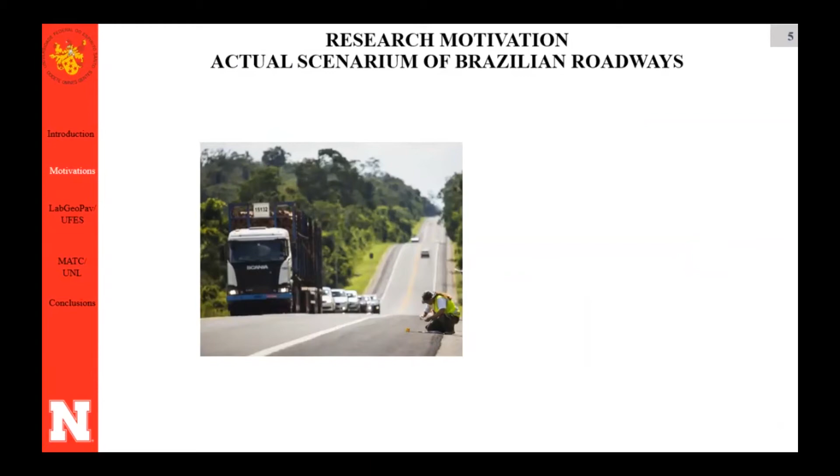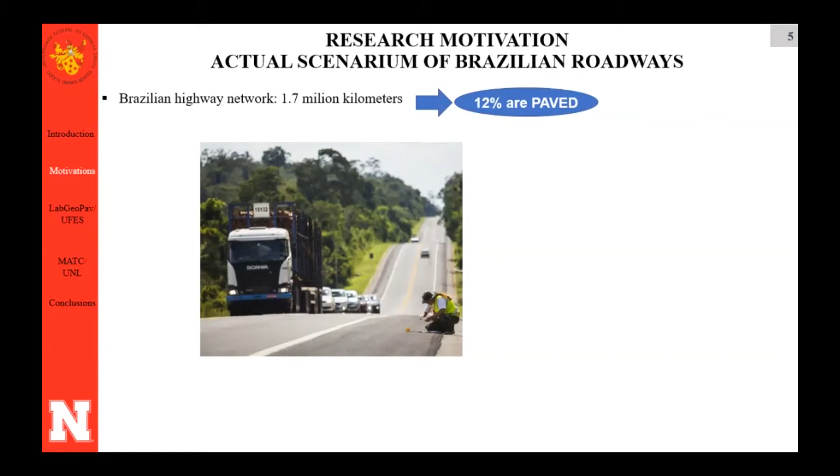And what are my research motivations? Many of you in this room got a chance to watch Dr. Rezende's presentation and mention how the conditions of Brazilian roadways are, and they are not in a good shape. Brazil has a total of 1.7 million kilometers of roadways - it's a really large country, but only 12% of the roadways are paved. So there is still much to be done in terms of constructing pavement structures.

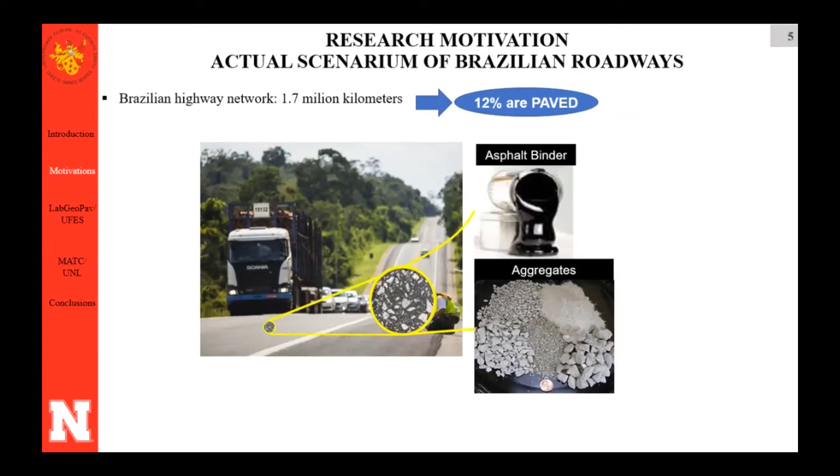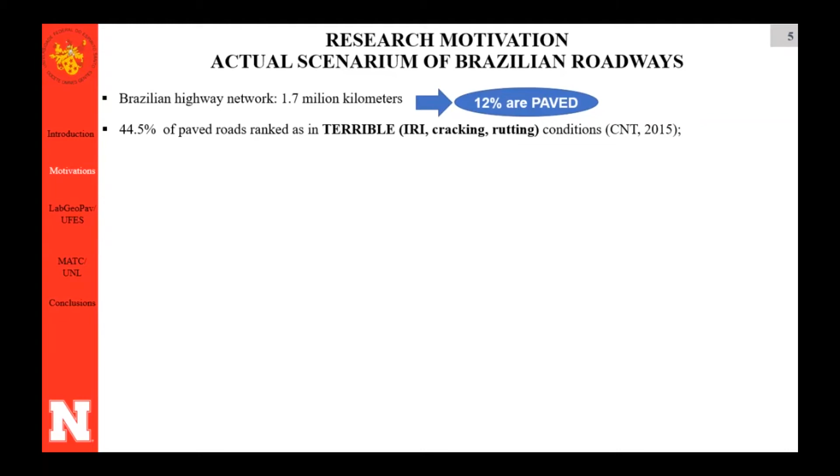Most of the roadways are made of asphalt, so they are flexible pavements, right? So the constituents are mainly asphalt binders and aggregates. The latest report from the national agency showed that almost 50% of the roads are ranked as in terrible condition. To rank as terrible, they have many forms that they fill out, and they mention the condition, the roughness index, the cracking, and the rutting on those segments that they evaluate to give the final report rank.

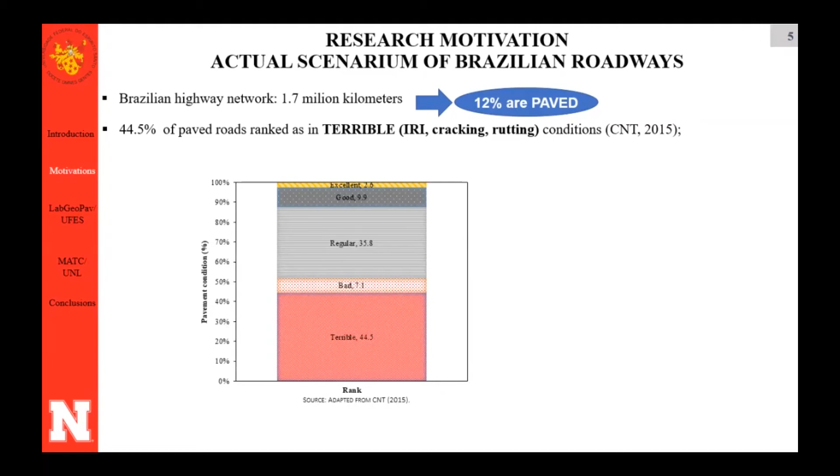So as you can see here, the conditions, more than 50% are either in bad or terrible condition. So we can see a lot of fatigue cracking or permanent deformation. This is just an illustration of the damage. And we need to improve the pavements.

In our state, in our university, there were no professors taking care of the research line related to the pavement area. So in 2011 was when I was hired as a professor, along with my partner, Patricio Pires - he's a good collaborator on my projects, you see. But both of us started to work at the university in 2011. From that year on, we started doing research in pavements at our university, the Federal University of Espirito Santo.

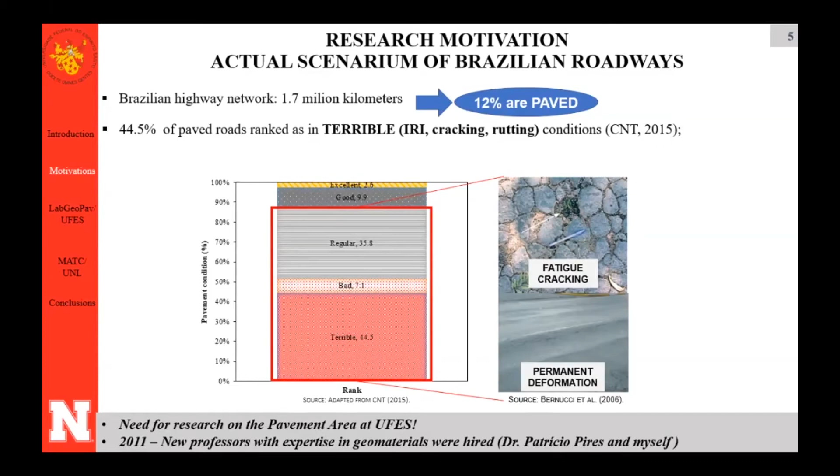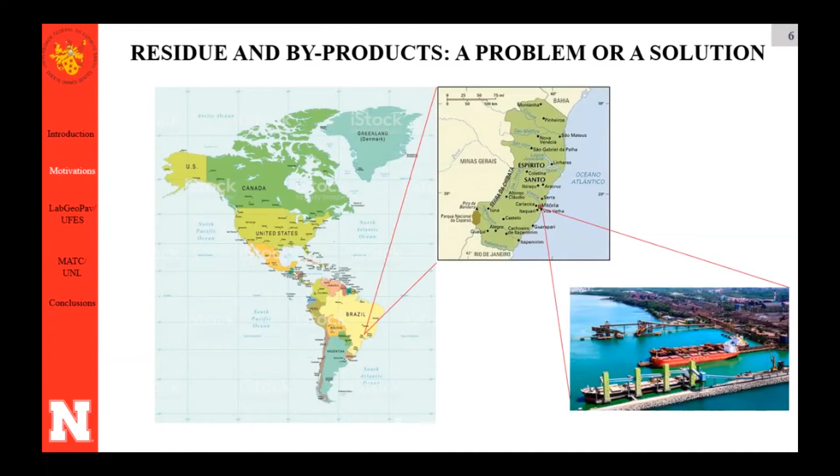Also, because of the geographic position, Vitória is located here at the coast. So there was the construction of the Port of Tubarão in 1966, which was constructed to export iron ore to the world.

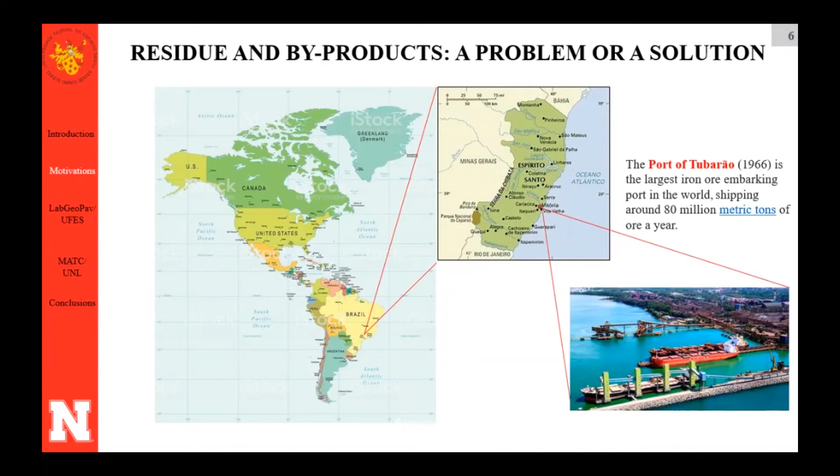This port is now the largest iron ore embarking port in the world. We have a lot of iron in the nearby states, and because of Vitória's position, we had this port constructed that can ship iron ore throughout the world.

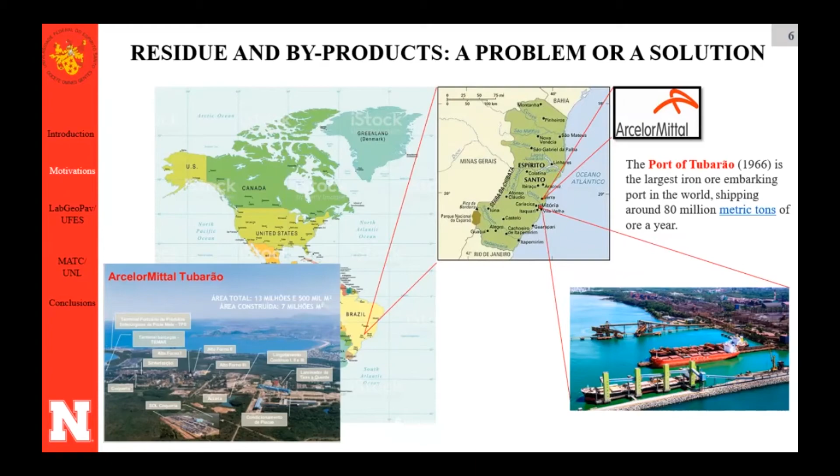With that, ArcelorMittal, a steel company, decided to construct a branch in our state, taking advantage of the raw material they need to make steel. So they have the iron ore available, and they built ArcelorMittal Tubarão, this branch of the international company, in Espírito Santo. They are one of the largest steel exporters in the world.

But because of that, we export a lot of steel, but we also produce a lot of byproducts from the steel company. One of the most known byproducts is steel slag. From the furnace, we have those molten materials that aren't good to remain in the steel, so they are discarded. When this material cools down, it becomes like a rock, and that's what we call steel slag.

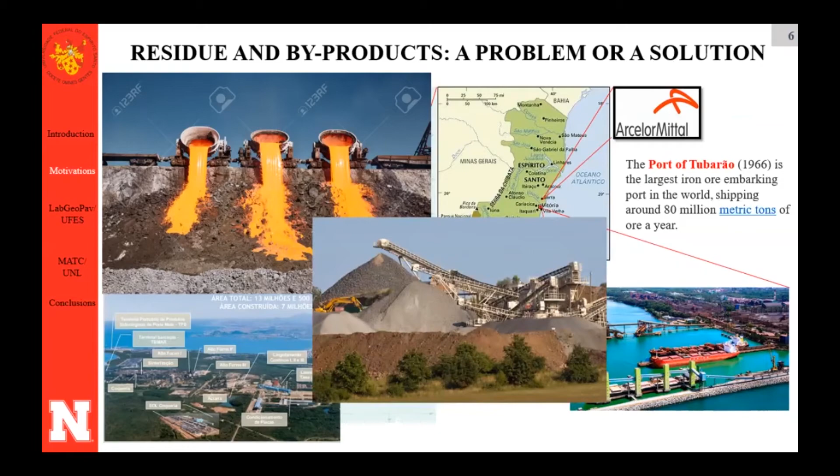They needed to find a use for this material, and they looked to us at the university. I have a deep passion to study pavements, and now I've started to have a deep passion to study a use for a material in my region, in my state, that needs a noble destination. So that's when we started to work with steel slag, to give a noble destination for the byproduct of this huge industry located in our state.

They looked for us in the laboratory at UFES, so we started to put together this group of researchers, myself and Professor Patricio, and we started getting master's students to work with us on this subject.

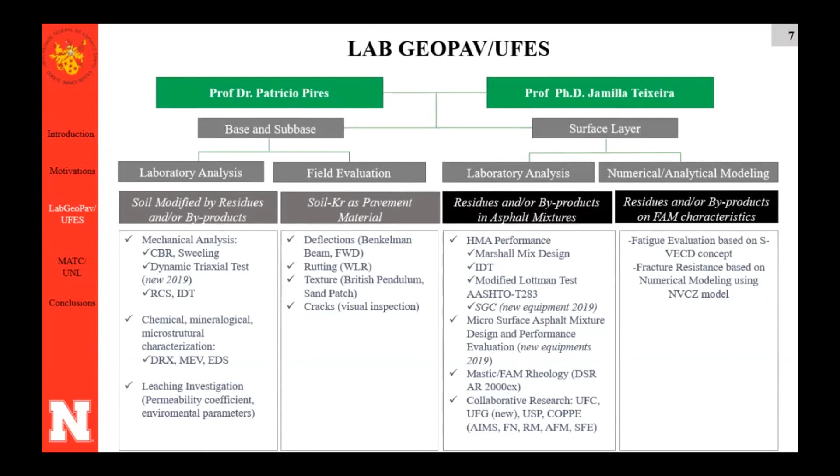Since this first contact between ArcelorMittal and us for the projects, we've developed many research studies about the use of slags. So far we've investigated laboratory analysis, field evaluation, laboratory analysis for surface layer application, and also numerical modeling. All those big topics have slag involved somehow during the analysis of the material.

What I brought to talk about today are two of the main applications we look for with slag. One of the applications is to use slag as an aggregate for asphalt mixture production.

This project, we just finished one part last year, and we're continuing to work on this same project but doing a more in-depth evaluation. Basically, slag - the LD slag, there are several types of slag - has favorable frictional properties. It's a high hardness strength material, which is good for pavement and can resist stripping and rutting.

However, one of the reasons people in Brazil still think they cannot use slag as a material for pavement construction is because of the expansion of this material. If this material gets in contact with humidity and hot weather - heat, with heat and water - this material can expand. So they think that if we put this material as an aggregate in a pavement structure, we can develop internal stress that will trigger cracks on the pavement.

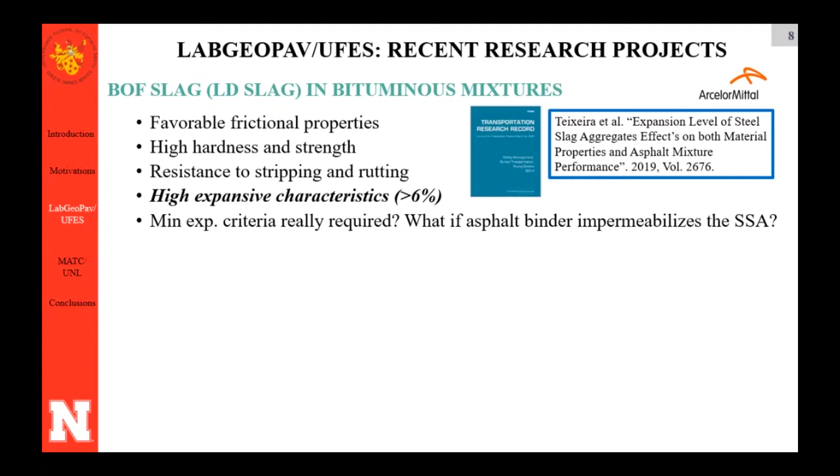Why did we evaluate if this slag will really expand when used as an aggregate for asphalt mixture production? This study was published this year at the TRB. I can say it's in the initial part, still a lot to be investigated, but we published the results, and I'm going to show you in the next few slides the results we got.

Another study we also have about the use of slag is the use of KR slags, another type of slag that does not have expansion at all - actually, there is some, but it's much less than LD.

It's usually lower than 3%, so it's ready to be used in pavement. But it's like a new slag in our state, because the process to get KR slag was recently added to the steel company. So we investigate the use of this slag for soil stabilization, because this slag has major chemical components that make possible this material have some pozzolanic reactions as cement.

There are many references that talk about the use of slag already as a cement material. They call it slag cement, actually. This study was also published this year. We did a laboratory and field evaluation of KR slag as a soil stabilizer, but I'm not going to go deeper on this subject because I would need another hour just to talk about this project.

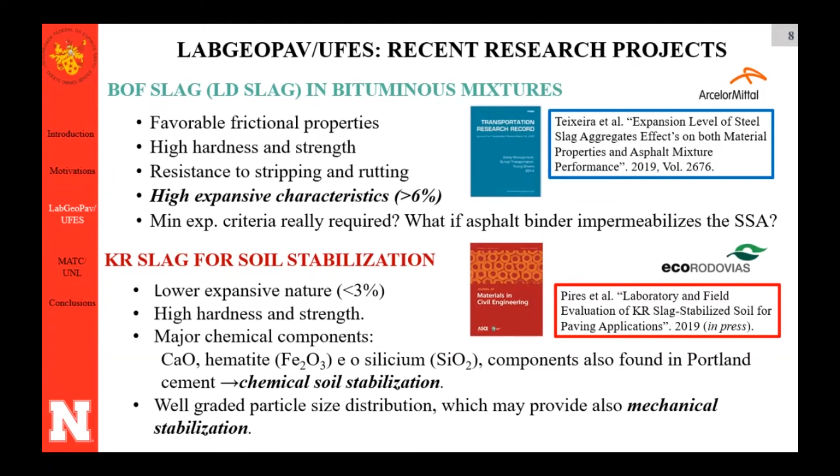So I will talk about this one instead. I'm very interested to talk about this other work that I do, which is related to numerical modeling, but still involves slag in this analysis. This is the student, Rodrigues, the first author of this paper, who tried to evaluate what happens if I add slag to my mixture, how the characteristics of the mixture will change. We tried to narrow this down by evaluating the characteristics of our fine aggregate matrix to assess cracking initiation and propagation.

So the question was: can LD steel slag be used as a filler in asphalt mixture? Does the type of filler—if I compare slag with hydrated lime, for example, which is a common filler in asphalt mixtures—influence the rate of crack initiation and propagation? And if I go for numerical modeling to evaluate that, what are the required laboratory tests needed to get the input for the modeling part? And if I use numerical modeling, what are my limitations with the models we propose?

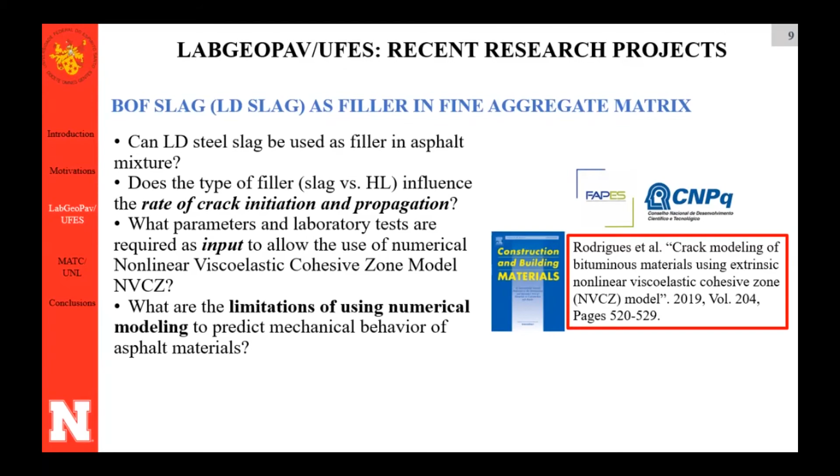So going now for the results of the two projects that I brought, which we did in Brazil, that are very related to the tests that I could do here in UNL. Let's talk again about the project that evaluates the effect of steel slag expansion.

For that project, we took a sample of slags from the steel industry as is, without curing. This batch of slags we brought has an initial level of expansion that is very high, 6.71. We separated this big batch into 3 groups. The first group we characterized as is, with no curing. The second and third groups we cured in the laboratory to reach lower levels of expansion. And we also characterized those materials.

The goal here was to see if, because of expansion, something changes in terms of material characteristics, mainly the materials required for pavement use. And in asphalt mixture, if I change the level of expansion, does it change something in my mix design? Do I need more binder, less binder? How about the performance of the mixture—the Marshall stability, the indirect tensile strength? What's going to happen if I have different levels of expansion?

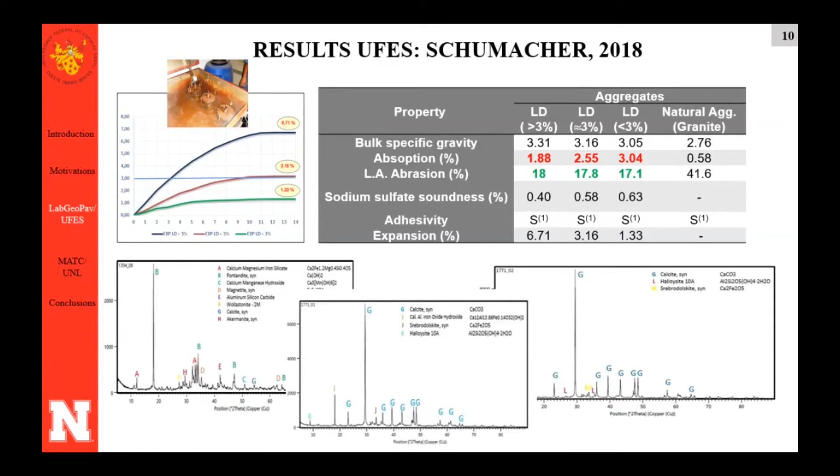The binder content didn't change. Our initial thought was that we would require more binder, but since we only replaced 25%, it didn't affect the volumetrics. This is very good because when you present this to industry, for HMA plant production, they don't want to increase the binder content. We can say you can replace 25% and still don't need to change the binder content after mixture. But if you go for a higher amount of replacement, we tried 50%, and the binder content increases.

The explanation for us was that slag has a higher absorption, so for higher levels of replacement you need more binder. But at a certain level, you can still get the same binder content. Even at 5.9, there was no problem. It's not that much, let's say. It's still economically feasible, not a number like 8% binder.

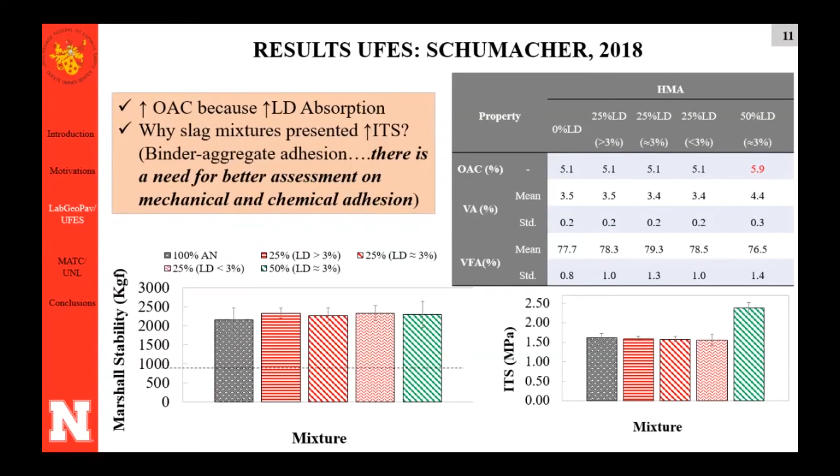Why did that happen? Better adhesion? There are some papers trying to investigate adhesion between slag and asphalt binder. Or it could be because I used more binder. So there's a need for a better assessment of mechanical and chemical adhesion. I'll leave this question now, because it will be answered with results I got from UNL collaboration.

Changing subject again. That was about the slag project regarding the effect of expansion.

We also did numerical simulations to see the effect of slag on cracking development, initiation, and propagation in the fine aggregate matrix. Rodrigues, my master's student who finished last year, did a numerical analysis of the effect of slag as a filler, and compared the results with the same mixture using hydrated lime as filler, to see the effect of slag on the modeling parameters.

She did a DSR test to obtain linear viscoelastic properties, then an SCB test for an experimental-numerical calibration procedure to get the nonlinear viscoelastic cohesive zone damage parameters. With these nonlinear viscoelastic cohesive zone parameters and linear viscoelastic parameters as input, she could validate the mixture performance in another test.

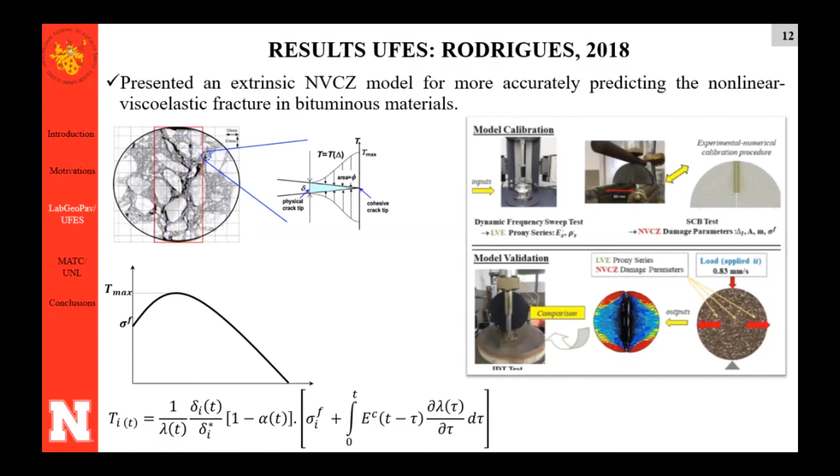The model she used is the nonlinear viscoelastic cohesive zone model proposed by Allen. In this model, the traction separation curve in the cohesive zone is nonlinear, as you can see here — that's why it's called nonlinear viscoelastic, since it has viscoelasticity included. The model is also extrinsic because the cohesive zone only starts after a certain level of stress, not from zero.

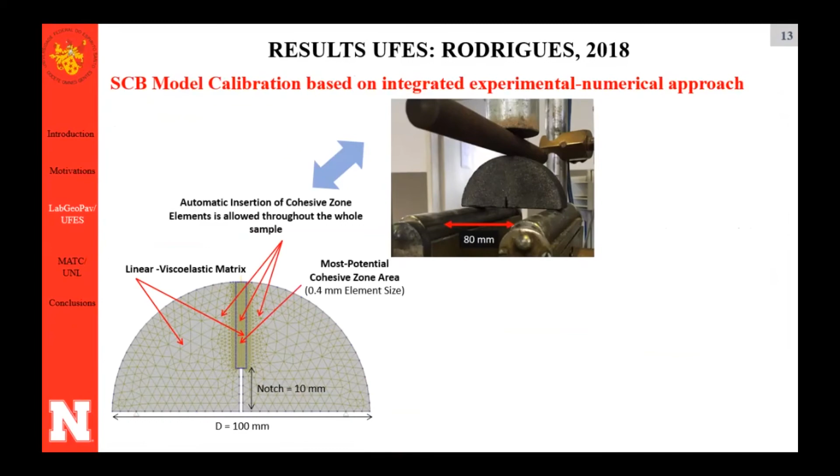So she did the DSR test to get the linear viscoelastic properties, then the SCB test, where she allowed cohesive zones to develop throughout the sample, and played with the parameters until she got a good correlation between experimental and numerical results. That's what we call the calibration process.

From that, you can see experimental results in black and numerical results as the colored lines, comparing the fine aggregate matrix with slag versus the fine aggregate matrix with hydrated lime — there are some changes in the modeling parameters. The student did a parametric analysis of the effect of each parameter, which I won't go into, but I want to highlight the change she observed.

For the mixture that used slag, the delta value was higher than the delta value for the mixture using hydrated lime. From her parametric analysis, this is an indicator that slag may produce a more ductile material.

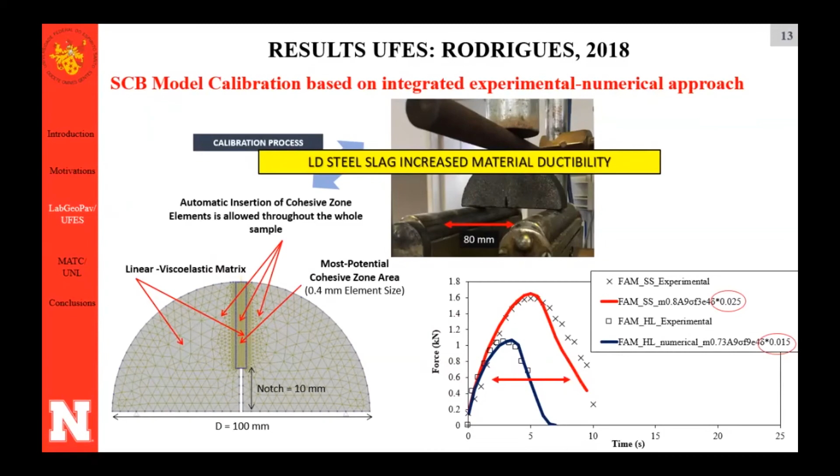So we have an increase in the area under the curve, which makes the material more ductile. She also observed that the M value increased with slag, 0.8, compared with hydrated lime, 0.73. That means the damage propagates slowly in the sample with slag compared with the sample with hydrated lime.

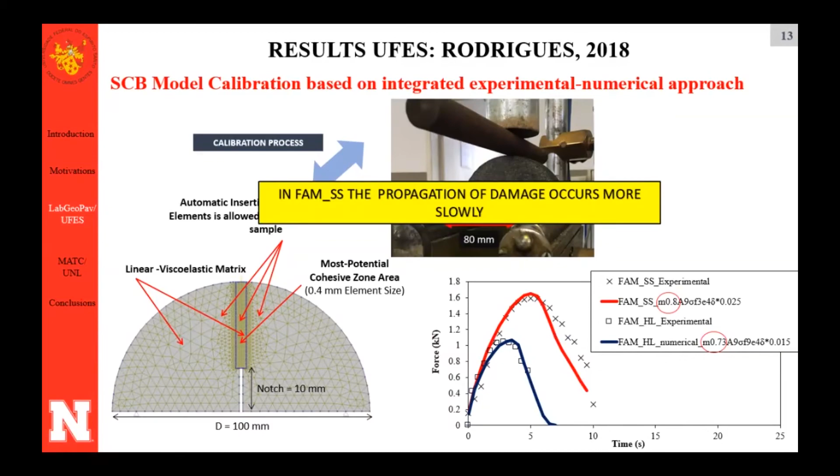Finally, she saw that the stress initiation criterion is lower for slag compared with hydrated lime, and this may represent the material behavior: slag reduced the brittle fracture behavior. The more brittle the material, the higher level of stress initiation criteria we expect. So slag was less brittle, which also corroborates with the delta value. It's more ductile, and we have cohesive zones developed earlier in the mixtures with slag.

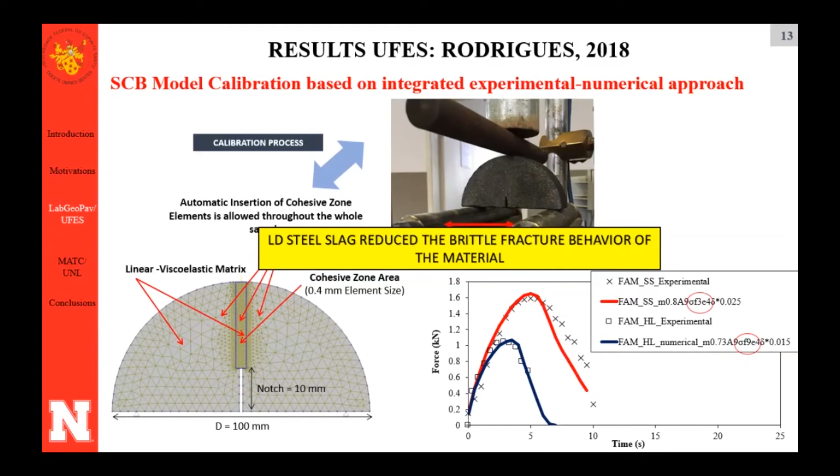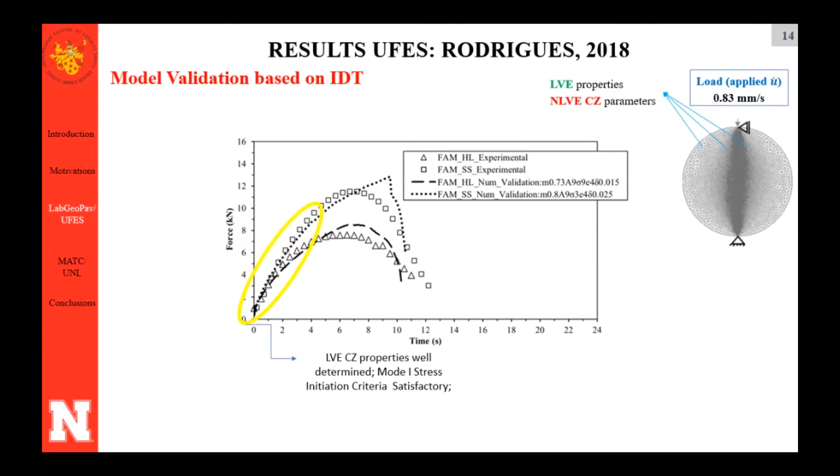So she took the parameters from calibration and used them as input to simulate an IDT test for validation. We observed that the initial slope of the force versus time curve was very well determined, showing a good match between experimental and numerical results. The mode 1 stress initiation criteria was satisfactory because it also impacts this initial slope.

But we didn't have a very good match after the peak load. This may be due to some mode 2 fracture happening, because when we do a calibration, we calibrate mode 1 parameters, but we still need to find mode 2 parameters. We also didn't consider that the test we used, the IDT, is different from the SCB with a notch, which is considered pure mode 1.

IDT may also have some mode 2 cracks being developed, and maybe if we calibrate or find a way to get mode 2 parameters too, we can get a better match after several cracks have developed.

So the mode 1 nonlinear viscoelastic cohesive zone parameters from the integrated numerical-experimental approach seem to be well established. The results are fairly comparable between numerical and experimental analysis. The parameters could be validated considering different test modes—we got the parameters from SCB and validated them with a different test mode, which was good.

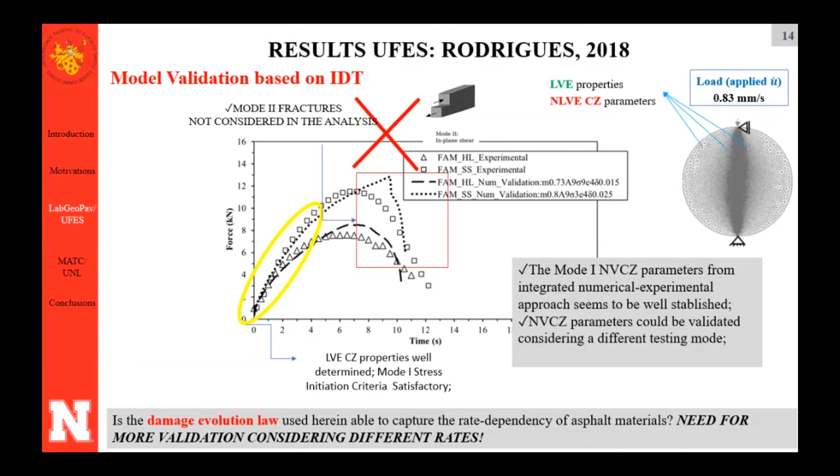But one question still remains. We did this validation considering one testing rate, but what if we change the testing rate? Can we still use the same parameters? We still need to investigate further to evaluate different rates, or if we have aging, what happens with those parameters? Those are all questions remaining that we continue to research.

So with those two results in mind, I hope you still remember—it's a lot of information, but they are well linked with things that I did here. I came to Nebraska in April 2018.

Those results that I presented, I had just finished in Brazil and then I came for this appointment as a visiting scholar. What I was hoping to get here was knowledge, and how do we get knowledge? We need books, we need fundamentals, right? And I had Dr. Kim, who has a lot of expertise and fundamentals in his mind, so we could meet and talk and I could get more fundamentals from him.

We also get knowledge from people, and by getting together with this group of students, PhD students from Dr. Kim's group, I also gained a lot of knowledge, believe me, from each of you guys here. And to get knowledge, we also need technology—we had good technology here with the Nano Center, with the laboratories under Dr. Kim's supervision. So I had everything I was dreaming of as a researcher: good people with good knowledge and background, fundamentals and technology. So I can say that this would be a nice experience for the postdoctoral program.

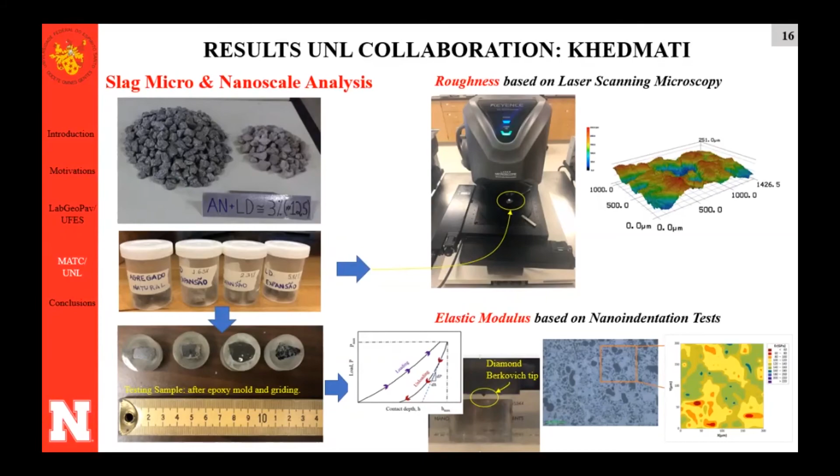So from the nano-indentation results, what I could think—and again, it's still a never-ending thinking process—was that natural aggregate seems pretty homogeneous when you look using the nano-indentation equipment. This was expected, as Nadia told me, for natural aggregates. But she was surprised when we put the first sample of slag and we saw heterogeneities throughout the analyzed area. And this heterogeneity seems to decrease as the slag is cured, at least from this

So I compared this with the chemical results I had from Brazil from X-ray diffraction. We also observed from the X-ray that we had many chemical components for the high level of expansion. And after curing, we have kind of a stabilization of the chemical components. So the results match.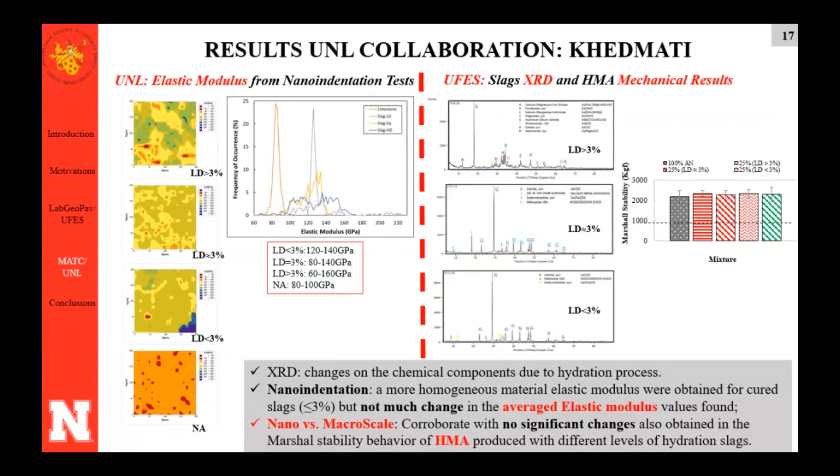The higher the roughness, people say, the better the mechanical adhesion between binder and aggregate. But why, when I have more slag, do I have a higher indirect tensile strength? Indirect tensile strength is an indirect way to measure how these components work together in terms of adhesion. But the roughness of the natural aggregate is higher. So why did that happen? I was expecting lower roughness for the natural aggregate and higher for the slag.

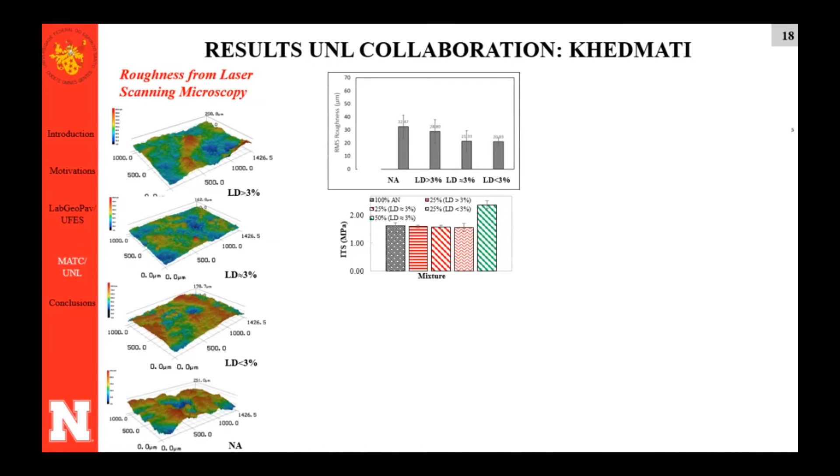Then I could say, oh, that's why slag has better performance—higher roughness means better bonding between binder and aggregate. So maybe the chemical characteristics, not roughness, give the chemical adhesion that's more significant than the physical, mechanical adhesion. From this study by Caro and Rojas from 2019, they show there are some chemical components that are really important for better bonding between aggregate and binder. It seems like silica plays a negative role in terms of adhesion, while oxides of aluminum, iron, and magnesium have positive effects on adhesion.

So I went back to my chemical results, and what I observed was that my slag has a lot of those good oxides: calcium 43%, iron 26%, aluminum, magnesium 5%. It also has silica, which is negative, but only 12%. But my natural aggregate was a granite, which is rich in silica, and that brings the negative effect.

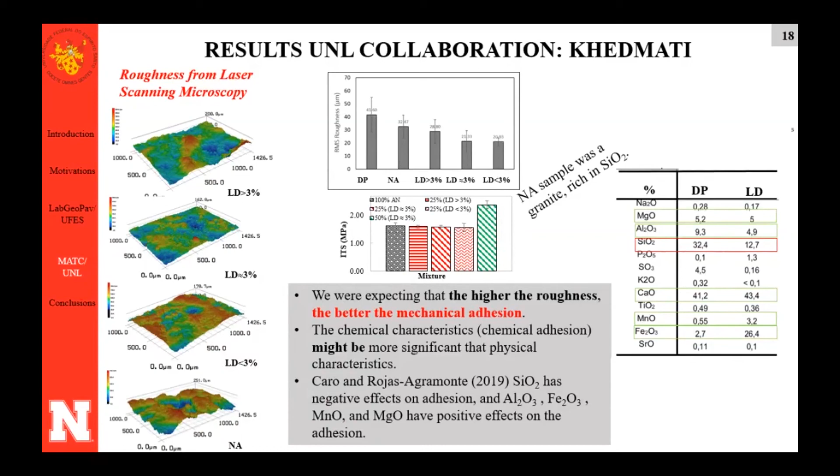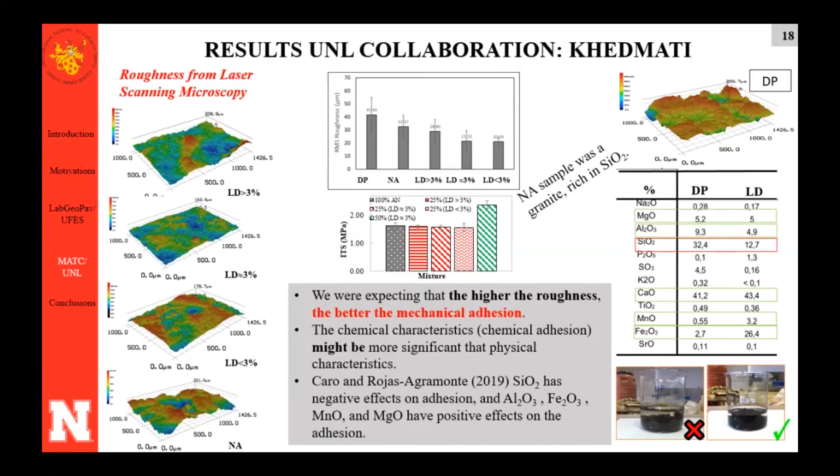Going now to the numerical analysis, it was another topic that I worked on heavily here in the US during my visiting appointment. To model cracks, we use the so-called cohesive zone models. The main differences among the available cohesive zone models in the literature are in the initial slope and the shape of the curve after peak.

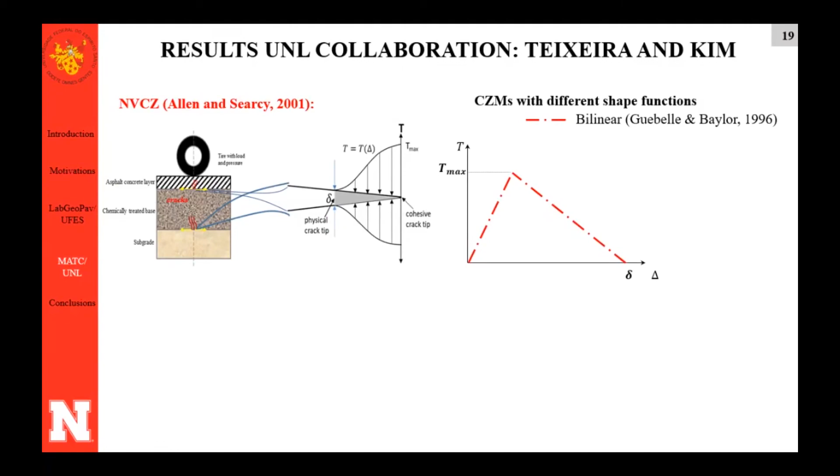Many studies use the bilinear model, it's the simplest model. It considers a linear decay after peak, and the initial slope starts from 0. This model is called intrinsic because it starts from 0. There are many studies that use this because it's the simplest and easiest to characterize in the laboratory, and it has 2 main parameters. But there are other models that are still intrinsic, starting from 0, but with a nonlinear decay.

So I just put here the Needleman model, which has exponential decay. There are the extrinsic models that do not start from 0, but start from a certain level of stress, and then decay. This one decays linearly, so it's the model proposed by Camacho and Ortiz. And we have the Allen and Searcy model, which is nonlinear, extrinsic, does not start from 0, and has a nonlinear decay.

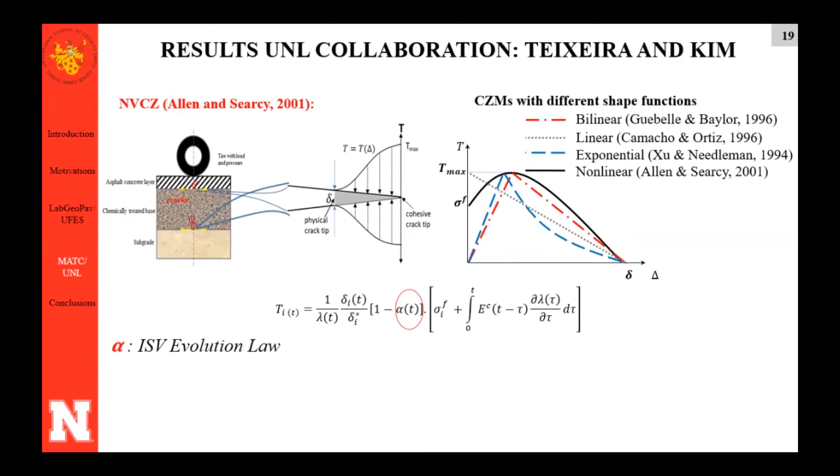We believe this model is more suitable for asphalt mixture prediction because it accounts for the viscoelastic behavior of asphalt materials by including the convolution integral in the model. But in order to use this model, we have to define an internal state variable that will dictate how damage propagates when cracks start.

This internal state variable can take different functional forms. Allen and Searcy proposed a phenomenological damage law that considers 2 parameters, A and M, to describe how damage propagates throughout the sample. But there's also another model proposed by Yoon and Allen in 1999, with a more theoretical framework. I'm not going to go into details about how they developed this equation, but there's a paper with all the details.

And there is this model proposed by Souza. It's based on a Gaussian damage law, which has this mathematical description.

Remember from the study I presented from my student in Brazil, she validated the FAM prediction by obtaining properties from laboratory tests and then simulating another test, but she did it for just 1 rate, and she used this model here for the internal state variable. So I needed to verify, what if I change the rate? Can I still use this model?

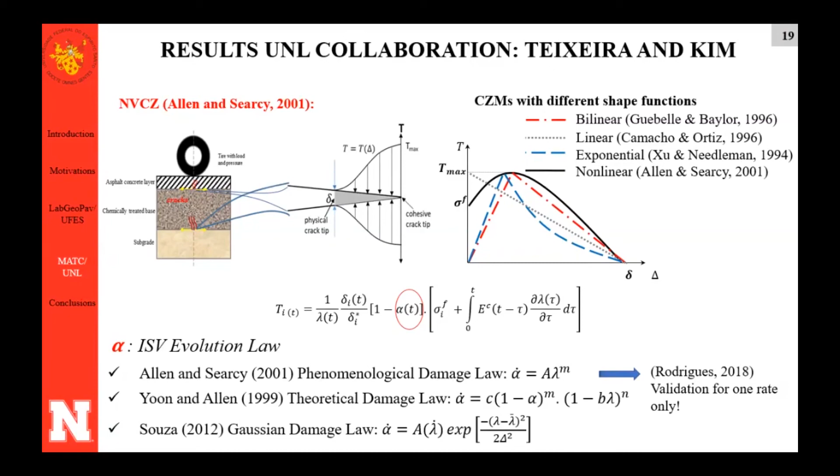To verify that, we started by looking at one study from Kim and Aragon, published in 2013, where they examined the fine aggregate matrix behavior at different rates. This is laboratory data available for us, anyone can use it. They had the linear viscoelastic properties there, so I could use that to verify if the model I'm proposing as the best one to predict crack initiation and propagation in asphalt is suitable as a rate-dependent model.

So I simulated the same test that the authors did. I input the linear viscoelastic properties that were available from this reference. The geometry of the beam was 150 by 75 high, thickness 25, with a notch length of 25 millimeters, and they tested 3 different rates. So what I did was take these tests and calibrate for 1 rate, 50 millimeters per minute, then used the same parameters to predict the behavior at the 2 other rates.

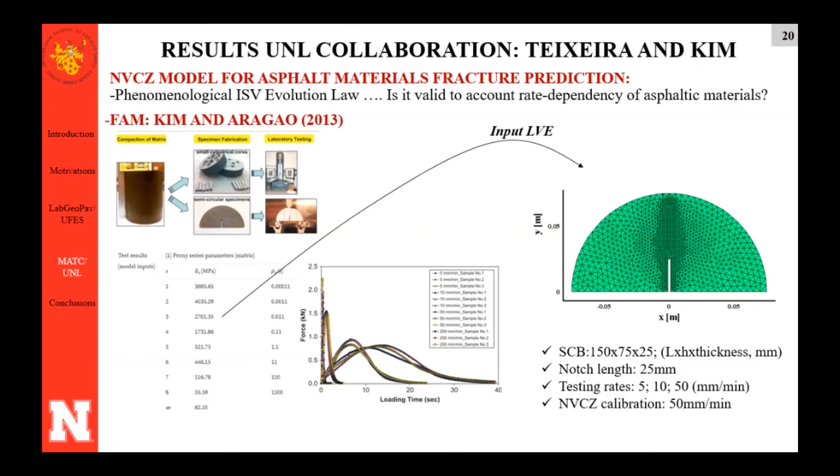In order to use this damage evolution law here, we need to recalibrate every time the rate changes, and we don't want that. We don't want a new test every time we change rates. And in pavement, we don't know the actual rate that the pavement is subject to. We want a model that takes care of the rate dependency of the material.

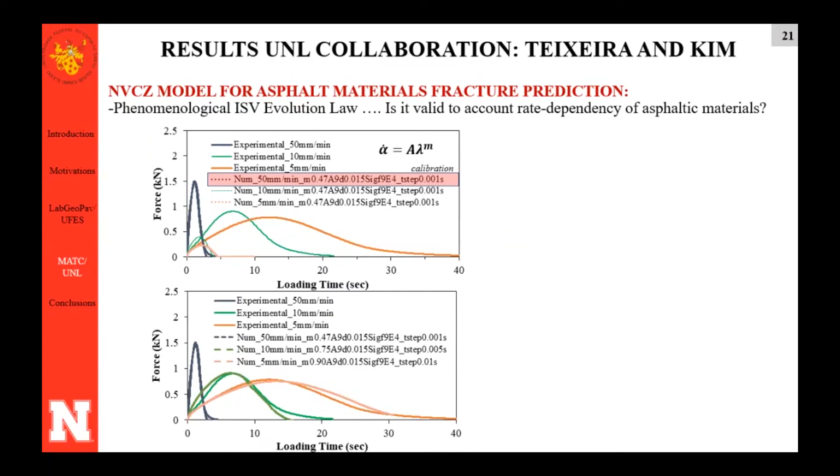So I tried to investigate other models available for damage propagation rate. By looking at this model that is based on a Gaussian function, you can see the mathematical description of this model. It's similar to the mathematical description of a Gaussian function because it was made based on the assumption that the material follows a Gaussian function. So the shape of the model has the shape of a Gaussian distribution function. So I tried to use this model that uses this internal state variable.

To use this model, we need two parameters: this big delta and the lambda bar. But lambda bar is not a value that we need to calibrate—it comes from an experiment, because if you plot the Gaussian function, the lambda bar will be the position of the mean value. So it comes directly from the experiment. Also, the big delta does not need to be calibrated. It's basically the standard deviation of the values throughout the X values.

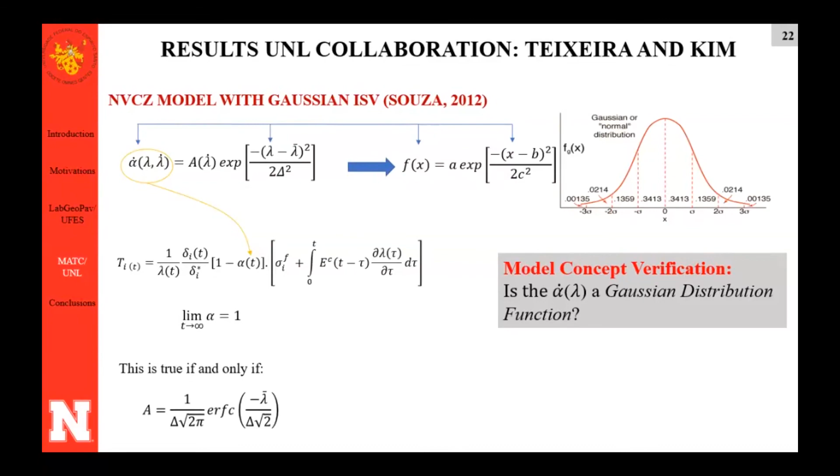So I tried to verify if this model based on a Gaussian function could work for our asphalt material predictions. First we need to determine our damage function. Here damage was defined as the difference between the non-damage and damage testing results. I have the experimental results from an SCB with damage, but I didn't have a test result for the non-damage case. For the non-damage case, I basically simulated the same test, but I didn't allow cracks to be inserted, so I would have my non-damage curve.

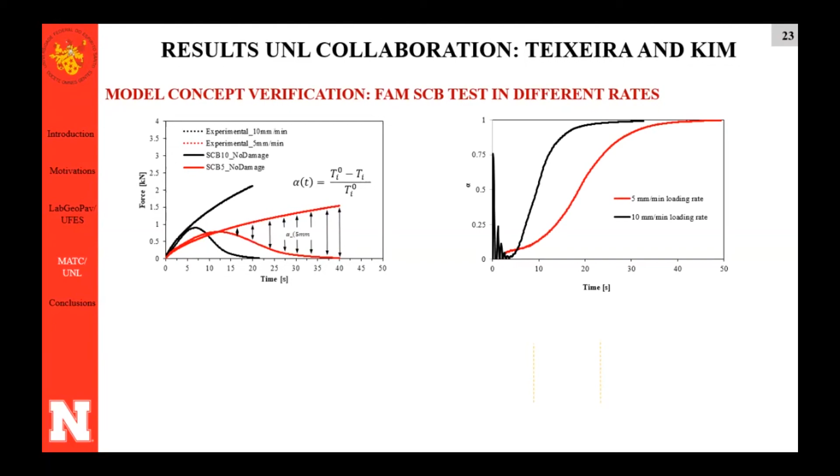So I calculate the alpha as a function of time, and we got this curve. Basically alpha goes from 0 to 1, and 1 is when we have complete separation. And we calculate alpha dot, the rate of damage propagation. And you can see the shape of the curves—it follows, not perfectly because this is experiment, but it follows a Gaussian distribution.

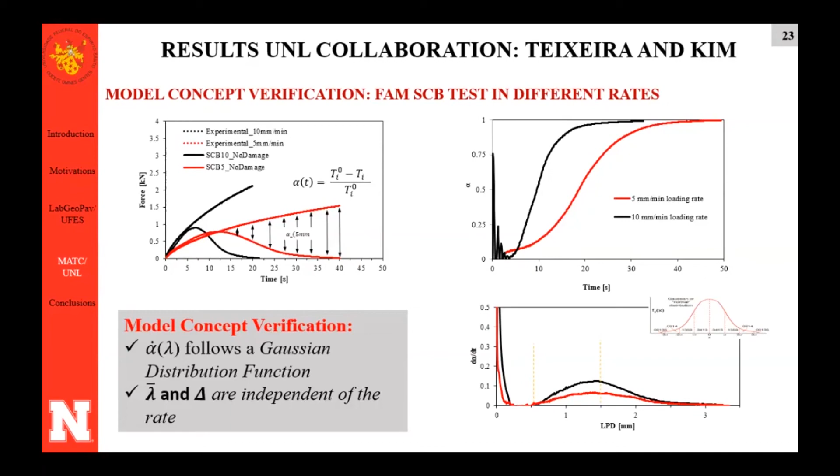And it's independent of the rates. The two parameters required for the Gaussian distribution function are the position of the mean value and the standard deviation. Even if I change the rate, the peak position is the same, so it's rate independent. And this big delta value is the standard deviation of the values found throughout the analysis data.

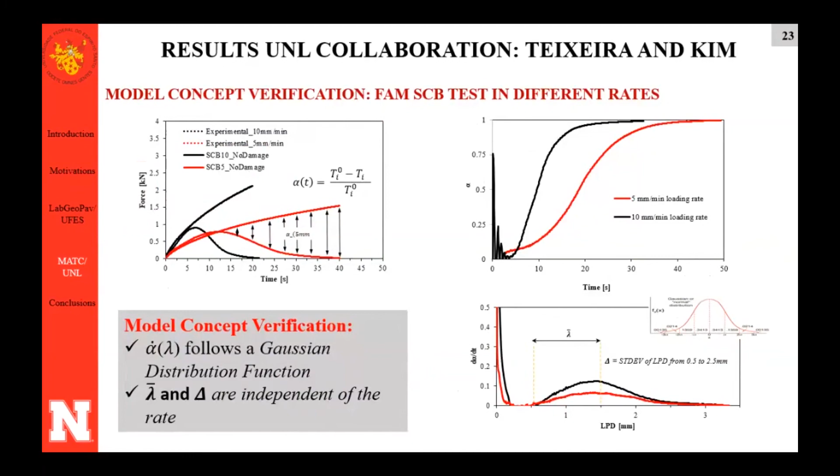So conceptually, this model may work based on this analysis. So I tried to validate it—we went for validation. I took one test data from that paper I used as a reference, taking the data from a loading rate of 10 millimeter per minute.

And I used the lambda bar value that was obtained from the analysis of the experimental data, and I also took the data for the big delta from the experimental data. But I saw that this value also needs another calibration. So I calibrated the big delta, using the same lambda based on experimental evaluation, and calibrated the results. You can see from the contour plots that the crack path actually follows what we observe in the laboratory.

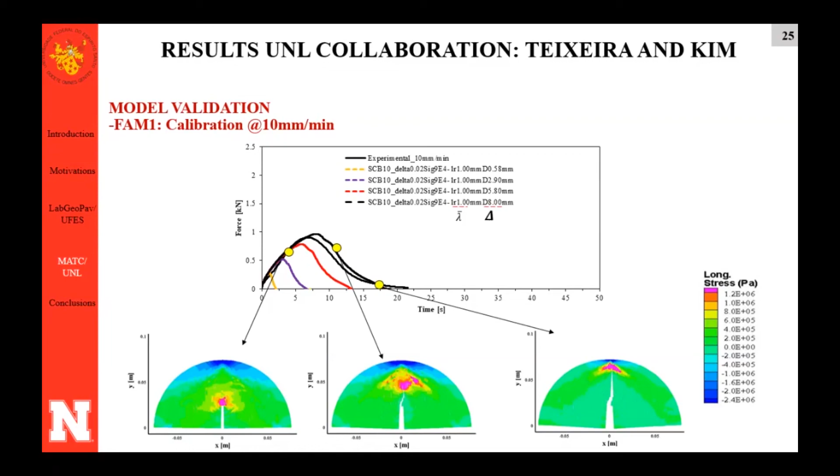So the same parameters that I calibrated for one rate, I could predict the behavior of the sample at different rates. So now we're talking about a rate-dependent model with an internal state variable that accounts for the rate dependency of asphalt materials. But one sample, one material is not enough—let's see if this works with a different type of sample.

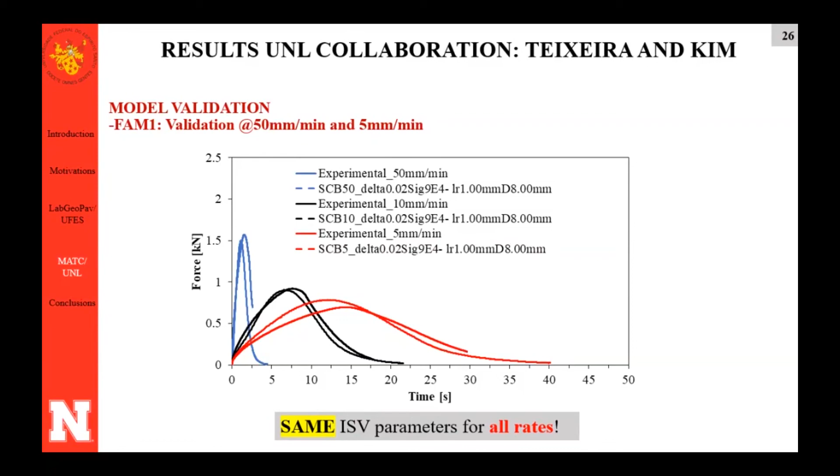My friend Laura, she had a test done here at UNL, with a FAM that was obtained from an open graded friction course mixture—totally different mixture composition than the previous one. She did two tests, an SCB test and a beam test, okay.

So here are the geometries that she used for SCB: 150 millimeter diameter, with 75 radius and 25 millimeter thickness. And the beam sample was 150 millimeter length, 75 height, with 35 millimeter thickness. Both samples have a 15 millimeter notch length. And she tested the SCB in 3 rates, and the beam in 1 rate.

She also obtained her linear viscoelastic properties from DSR frequency sweep test. We took this data, and Gabrielle Nsengiyumva helped us with the laboratory test, so she's also a collaborator on this part. And we calibrate her test from the SCB that we use for calibration. That's our approach to use this model.

Take an SCB test and calibrate for 1 rate. So we calibrate for 0.5 millimeter, and we predict for the 5 and 10 millimeter rates, different rates. And I also try to predict the beam behavior.

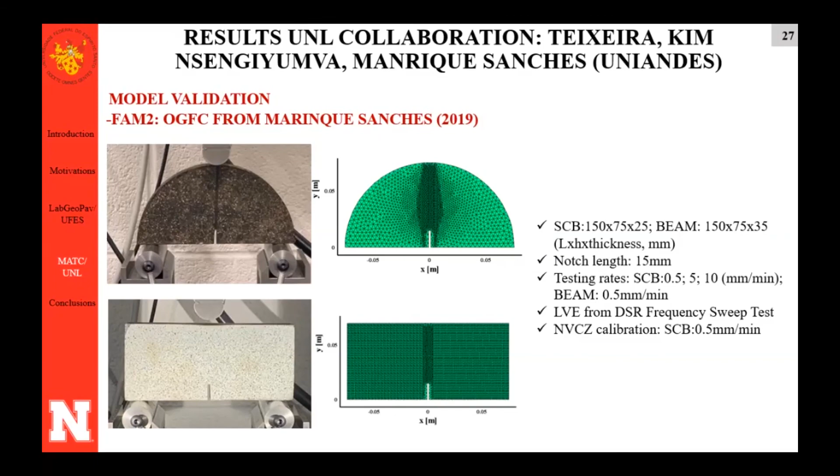So here it is, now with a difference between numerical and experimental. We calibrated the 0.5 millimeter, shown as the dashed lines. I just put 2 results here from the experimental data that Laura has, but Laura did 5 replicates from each rate, and I just took the minimum and maximum to show, because we have variability in the laboratory as well.

So we calibrate for the 0.5, and we use the same parameters to predict the behavior in other rates, and that's what we got, both numerically and visually in the contour plot.

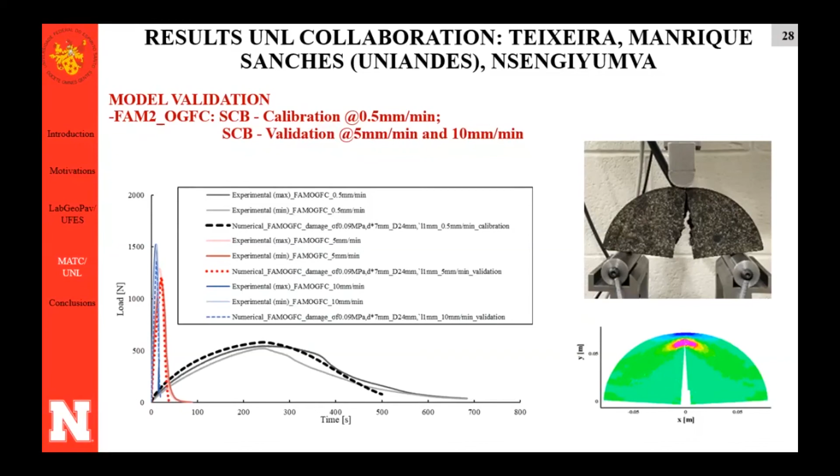So here is a movie. You can see we apply the load here at the center middle point.

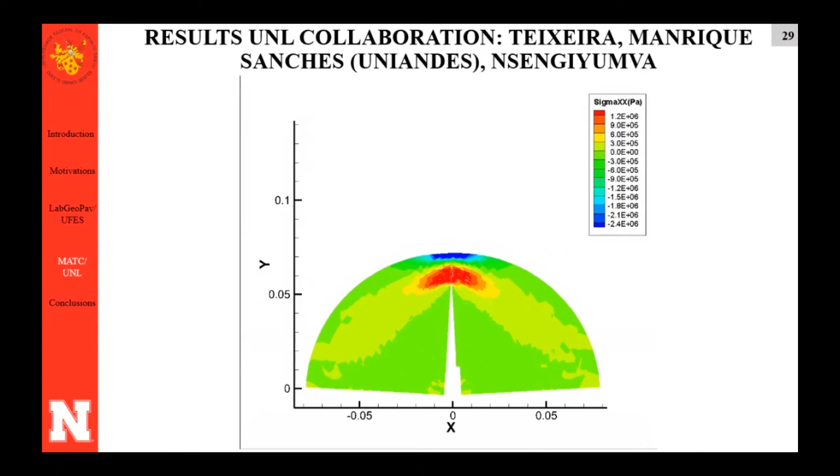So we have tensile stress concentration close to the notch tip, and compressive stress concentration where the load is applied. After a certain level of tensile strength, cracks start to develop and propagate throughout the sample. That's what we predicted numerically, and the same behavior was also observed in the experiment.

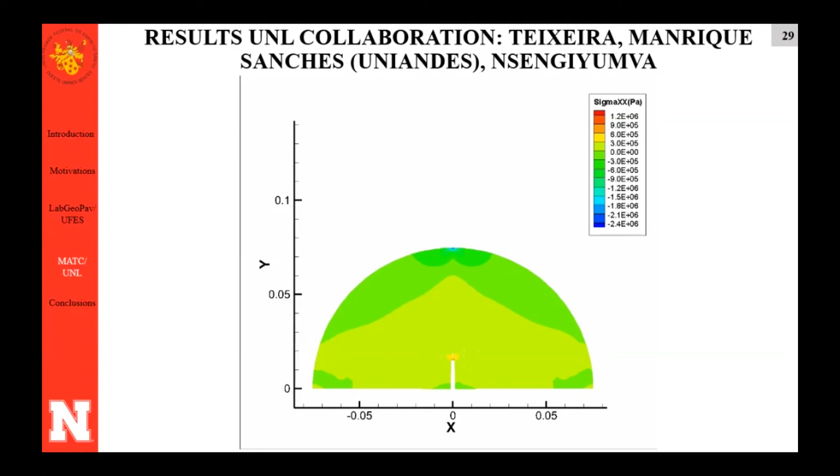Then we took the same parameters that we calibrated for one geometry, and we tried to see: can I use the same parameters if I change the test geometry? We got a fair prediction of the 3-point bending beam test with the same parameters, so the nonlinear viscoelastic parameters were geometry independent.

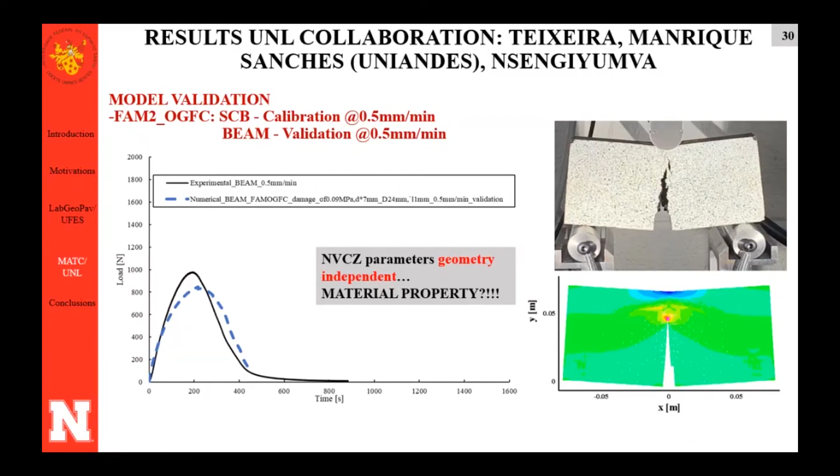So are we talking now about a material property? It's not a parameter anymore, it's not geometry dependent. That's one thing that we got, and we're still working on the analysis of this data. I brought this to show these interesting results, and again, the contour plots seem quite reasonable. The way the crack starts and how it propagates is reasonable with what we observed in the laboratory.

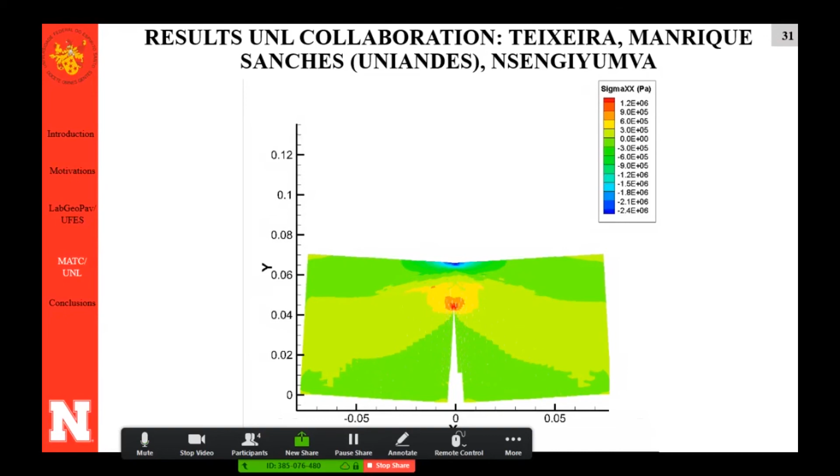This one is going slowly, so let me just move forward. This test is done at 0.5 millimeter per minute, really slow, but you can see the crack propagating at the center as we expect. So those are the results that I could get.

So basically I had one question in mind when I came from Brazil: can I use the nonlinear viscoelastic cohesive model, and which internal state variable should I use to account for the rate dependence of the material? We changed the way we approach the model, because we verified that the phenomenological law usually used for the nonlinear viscoelastic cohesive model is not enough to account for the rate dependence of the materials. By going through a Gaussian distribution function, now the model can account for the rate dependence of the material.

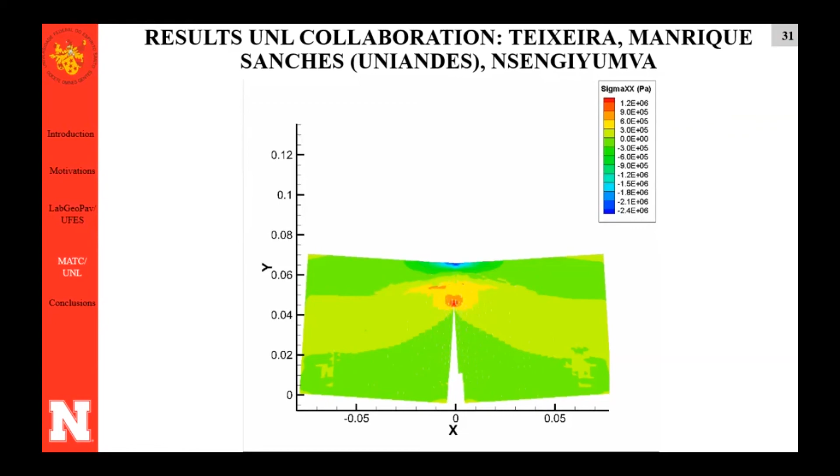With that, I end my talk here, and I put together everything that I could accomplish throughout this whole experience. This does not only involve things we can write and publish as papers, but much more, which is this relationship, multicultural learning with people from different countries, different cultures.

I could go to conferences, I attended 3 conferences throughout this year. Group meetings every Friday, very fruitful discussions with things I never thought I'd hear about, lunar soil for example, bond modeling - asphalt is what I'm used to, but I could learn so many things with the group meetings, and partnerships with other professors and researchers that we will continue to work with.

And personal achievement: my first half marathon, in Lincoln. I could run my first half marathon, and it was in Lincoln. And my son and my daughter had a wonderful experience this year. So with that, I end my talk. Thank you.